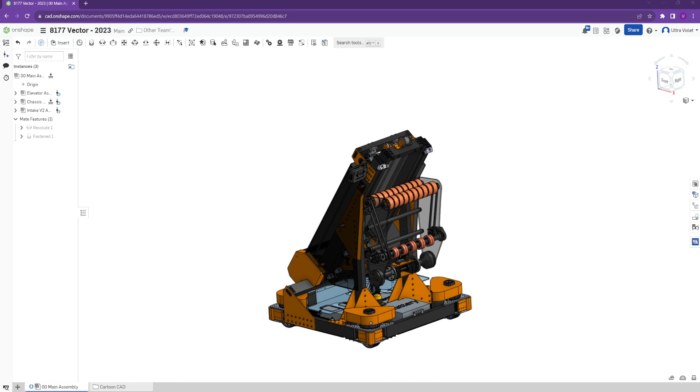Tonight we're going to be looking over one of our local teams that are pretty near us, Vector 8177. So they're an open alliance team, so they've been sharing their CAD and the progress of their season the entire time, and we've competed with them a couple times this season as well.

They had a robot that was pretty similar to X-Ray, but one of the reasons why I wanted to look at it was it's also different in a variety of ways. So seeing how another team built a similar robot to us and seeing some of the differences should be useful so we can see how we could have chosen to do things if we had decided to do something a different way.

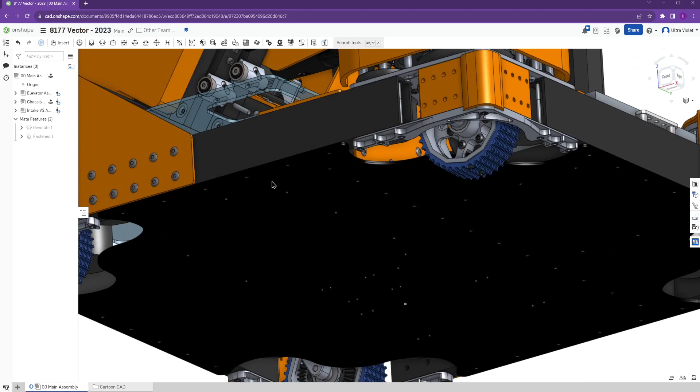So in terms of the mechanisms, they're pretty similar. They have a MK4I swerve drive base with a metal belly pan, same type of 2x1s connecting everything across. Versions of our Spectrum corners, I'm pretty sure this is actually modeled directly off of our 2022 ones. So a very similar drive base.

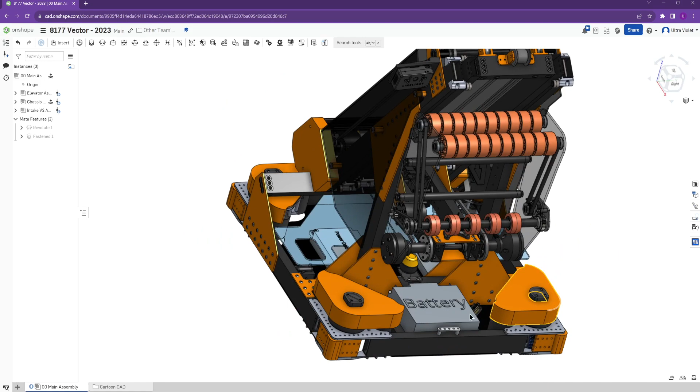But things start getting different when you start seeing just some of the dimensions and things on the robot. So if we look over, they're 26 by 26, so they're a square, where our robot was like 24 and a half by 27 and a half, something like that. So they're a little bit different, and they have a little bit more width to them, so about 2 inches wider and about an inch shorter in length.

So that does determine your wheelbase a little bit, so that means you're probably a little bit more stable from tipping over side to side, but slightly less stable tipping over forward backwards. There is some benefit to building even bigger, especially if you have a game where you have to reach up very high and where you might get pushed around at that same time.

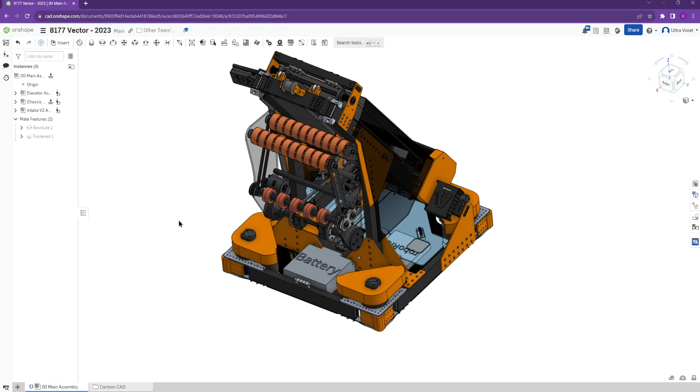So especially a game like 2019, where you have to reach up to the rocket and score on the high goals of the rocket, which was like 8 something feet in the air, and you had a defender that was possibly pushing into you. Having a much wider frame can be beneficial there, so you never get tipped over. Anything else you can do to keep weight down is always helpful, because that helps you not tip too.

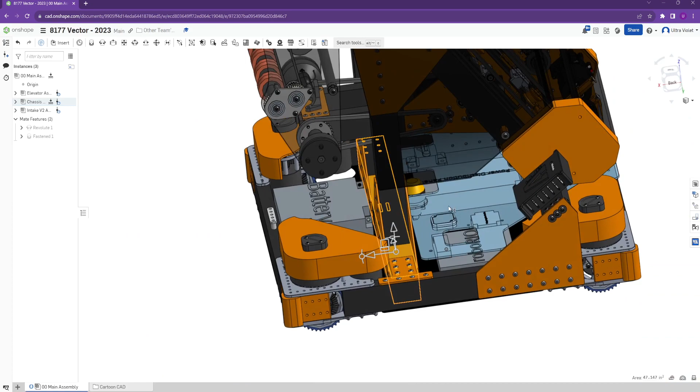The rest of their drive base is kind of built on what looks to be this main center pillar. So they're able to have this crossbar here that runs across their belly pan and separates where they have the battery. So they ended up putting the battery up front compared to ours, where we have the battery in the back. And then they have the rest of their electrical under what looks to be an electronics cover, and most of their main control system stuff, the RoboRIO, power distribution, all of that is on this side of that bar.

Looking at it, it doesn't seem like they have any wire pass-throughs up to here or anything, so they're just going to run everything over the center, so the battery cable probably just gets run over the center here. Likely with the lead sticking up, because otherwise they'd be hitting these posts here. In some way for a battery strap. I think this is a similar way that the Kitbot chassis does the battery strap right here.

That 26-inch width, one of the advantages of that is you can get the battery between two rails that run the whole length of your robot. This is basically the 2 inches that we remove from ours by having a 24-inch robot. And so the motors get a lot closer, and you can't really have these rails here if you do it to the width that we have been recently.

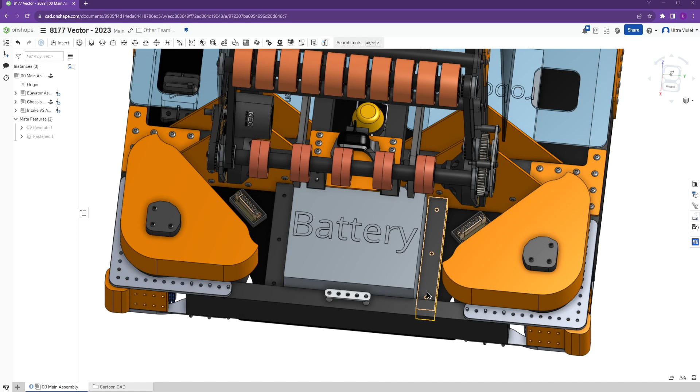So one of the thoughts is to go a little bit wider. It makes it harder for us since our laser cutter is the way it is. We can't laser cut our own belly pan if we do that, but we have sponsors who can laser cut belly pans, or we could route our belly pan if we needed to make it wider, or do the belly pan in 2 parts.

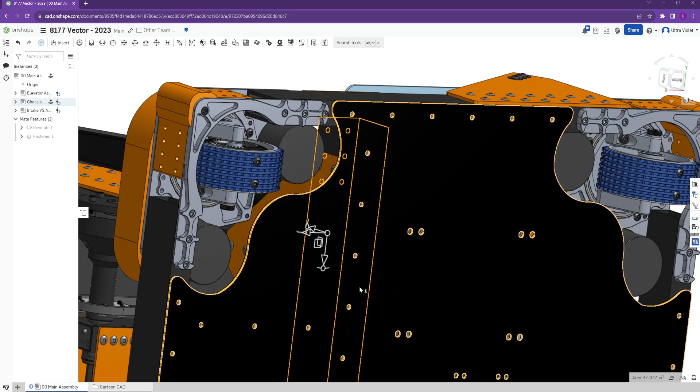So this gets fully gusseted. It doesn't look like it's mounted. Oh yeah, so it's mounted just on the center row right here to the belly pan, and then the gussets to the side rails, and then these big structural gussets up to the uprights that support the elevator.

And then the back end of their elevator is supported by a 2x1 cross beam, relatively similar to us, just going on top of their swerve modules. But they ended up doing it just by having the tube blocks here. So they have the bolts into

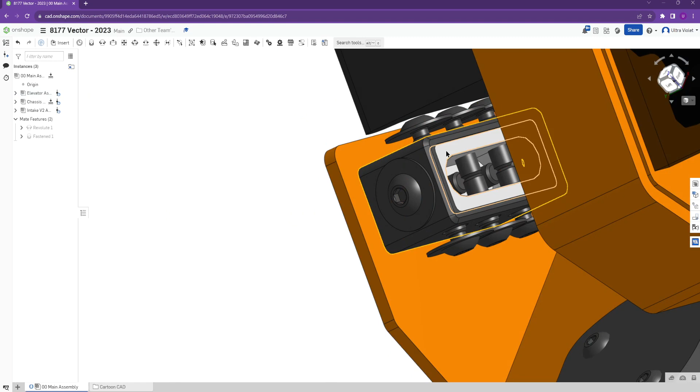the end cap or the tube end nut. If we hide that briefly, we can see the block inside of here. So these are the West Coast Products blocks. They fit inside with like a 3D printed exterior to fill the little gap, so you can use different size tubes. And then they just bolt everything into that. And so that's how they support their elevator across the back.

They have slightly different 3D printed covers than what we were running, where they just cover up the main motor gear set on the MK4i. But theirs seem to leave the belt exposed, so they can get in and probably do maintenance on it and things. And that still lets you grease the gears from underneath if you needed to, without having to take it off or anything like that.

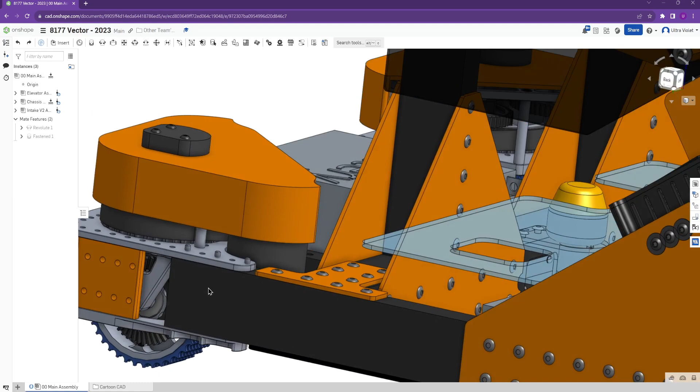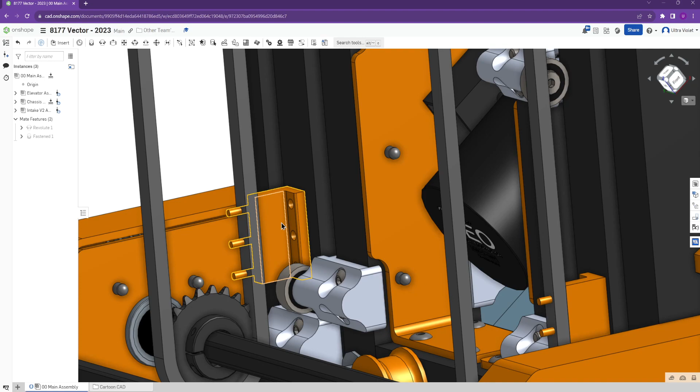All right, let's see. So going up, let me get rid of some of this covering to make it easier to see everything. We're just going to hide some Delrin panels. So the elevator looks pretty stock. They were actually using at least some parts from the Thrifty Bot elevator. There's different commercial off-the-shelf elevators you can buy from the different vendors. Like the Thrifty Bot has one, West Coast Products has one. AndyMark has some different parts of an elevator, so does Rev.

A lot of teams ended up kind of combining them to make the various elevator parts that they wanted. So they seem to be using the Thrifty Bot mounting bracket. These let you mount the elevator chain to your tube. These are nice big chunks of either aluminum or steel, I don't remember right now. But they're large and are spaced right for you to be able to put the pins through your number 25 chain and just bolt directly to it.

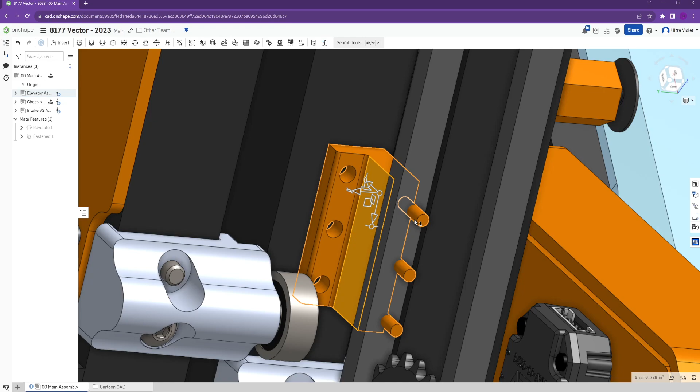So instead of us having that belt that goes through the whole elevator, they have these 2 loops of chain that power their first stage. So as they move this chain up, this stage of the elevator goes up and just gets powered directly by that.

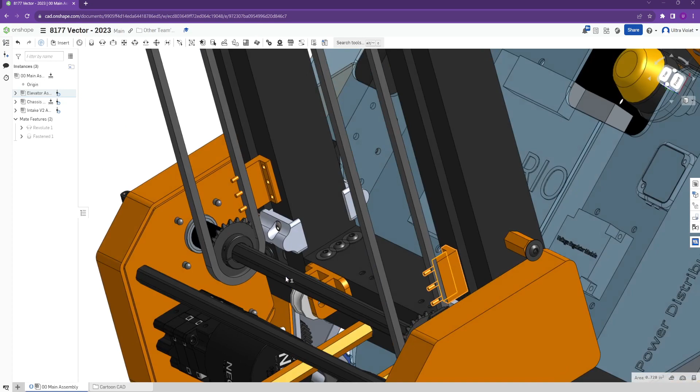They're also using West Coast Products bearing blocks. Oops, swerved around too much. Hold on. Okay. So these little bearing blocks here are the West Coast Products clamping blocks that go on the outside. And I believe these bolt all the way through. And then the inside bearing is on the block in here, like that. So you end up with a pretty small inside bearing, similar to what we had as well. I think they're like 1/2 inch diameter.

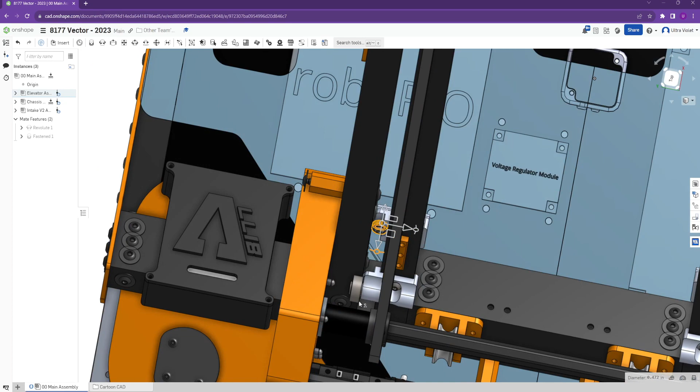I think they end up being half. It might even be a little smaller. But that's what the bearings ride on. This allows you to very easily use it with pretty much any tube. You can drill the holes yourself into tube, or you can use the Rev tube or any of the pre-drilled tube, and bolt all the way through onto the block. So instead of ours that bolted on the inside face, these clamp around the outside.

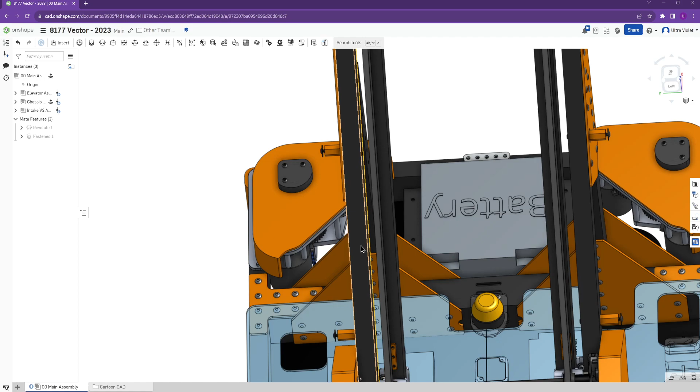And either of them still end up with a pretty large gap here between the tube rails, which sometimes can be a problem, but is also a lot of times fine. Most teams can get away with it without too much of an issue. Some teams use it for things depending on how they rig their elevator. Maybe easier to get string that runs inside the rails or belt or anything between it.

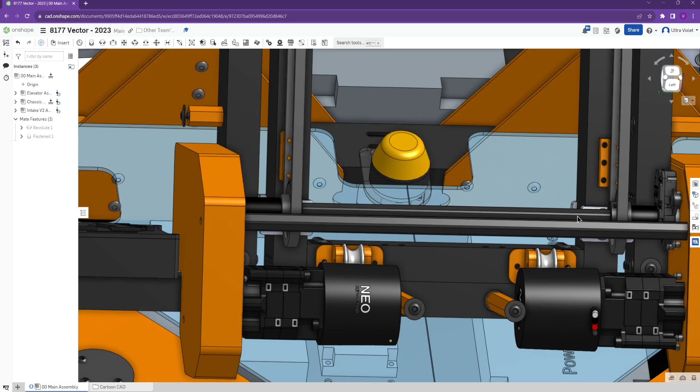The rest of their elevator, they use the tube plugs again, the same as where they mounted over here. There's tube plugs mounted everywhere inside these joints, so they don't have any external gussets. So there's not gussets running along these outsides anywhere. And if you had different bearing blocks, you might need them, but instead they're able to just bolt to the inside here.

So no gussets. It just kind of changes how you have to have your strength. All of it has to come from just these bolted connections. Most of the time that's fine. I imagine they didn't have these wide flange bolts everywhere, as they seem to intersect here. They probably just used regular bolts, at least on the middle one.

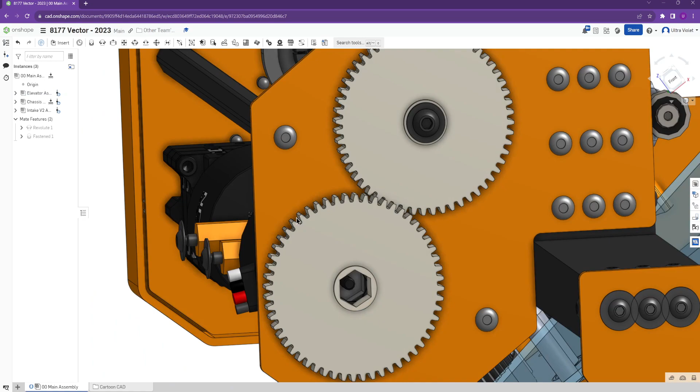To actually power the elevator, we have NEOs into MAXPlanetaries, into, let's see, if we remove this cover, what looks to be just a 1-to-1 gear reduction. So this was basically to be able to flip the motors around, not have them sticking out this side at all and overhanging. They just have, not even a gear reduction, just these two gears here to transfer the power here.

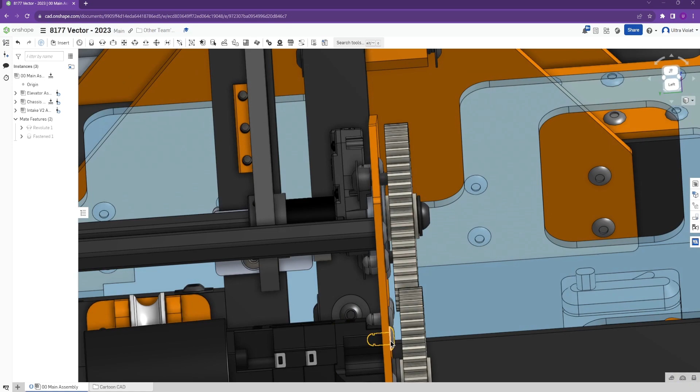Doing it with gears is fine. You could have also done the same thing with chain if you wanted to, possibly even belt if you had large enough pulleys. You could have done it with belt. It would have been a little bit thicker probably. It also means that if you have to change something up here, you don't have to take the motor off to do it. You're not direct driving the shaft. It gives you a bit more versatility.

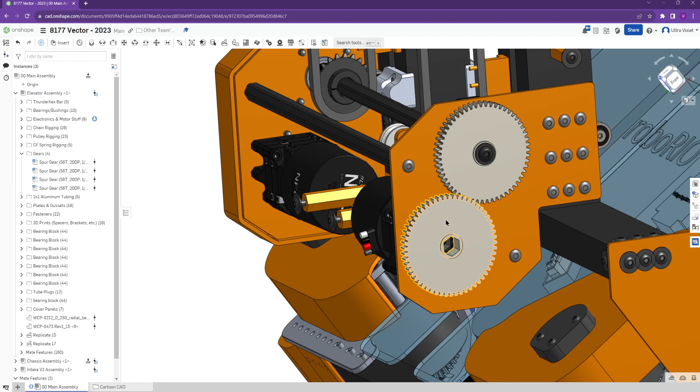If you needed to, you could possibly change this gear ratio. There's probably gears a little bit bigger than that. Let's see, that gear actually. Yeah, so it's only 56, so you could potentially make this gear bigger, make this gear a little smaller, and actually get a little bit of a bigger gear ratio, or go the other way if you wanted a little bit more speed. It might change how the covers and stuff work, but you could definitely do a little bit of configuring after the fact, after you build everything.

If you wanted to change your elevator speed a little bit, you could slow it down or speed it up by replacing these gears on both sides, in case you wanted to go a little bit more finer detail than you could get with just the MAXPlanetary here. Because the MAXPlanetary only has certain stages you can use, right? So if this is 2-stage, this is probably 3 and 3. For like 9-to-1, I don't know what it actually is, or if it's even configured to anything.

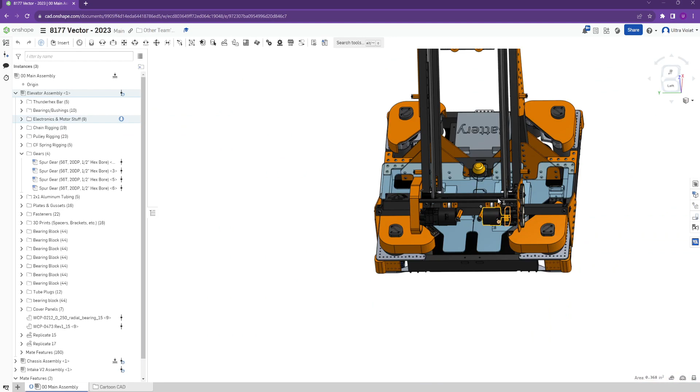Yeah, it's configured 9-to-1. So that's probably what they used in real life. Anything too much bigger than that gets you a pretty slow elevator. And then if you go down to 1 stage, you can only get to 5-to-1. So you have a pretty big gap in your reductions. We ran into the same thing. You're either at 9-to-1 or 5-to-1. So having this gear reduction out here does allow you to tune it a little bit more, which is nice.

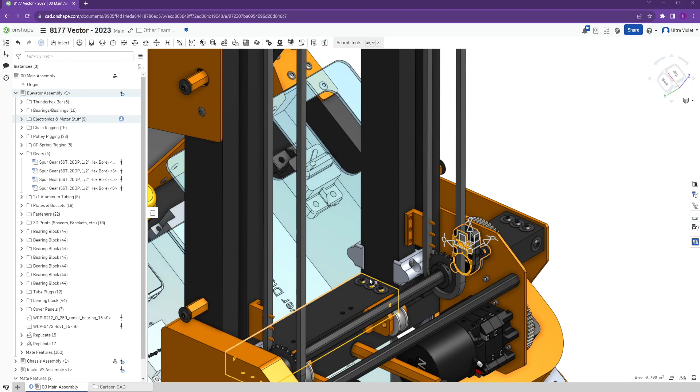Let's see. So they have the REV Through Bore Encoder. So this gives them an absolute encoder on this shaft, so they can use a little bit more precision in knowing where this shaft is when it's turning. Which is sometimes useful. You have to feed that back in either to the Spark Max or to the RIO directly. You also don't have any backlash from the gears or anything. So instead of sensing where the motor is, you're sensing directly where this shaft and sprocket are. So it probably gets you a little bit more precision on exactly which height your elevator's at.

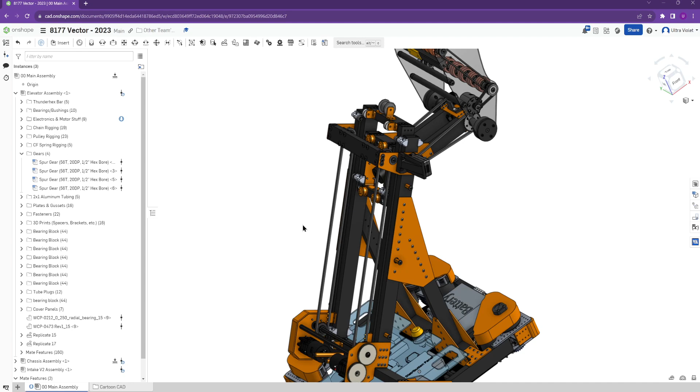What did we discuss? Okay, so we talked about the first stage of the elevator going up, powered by the chain. And so when you have this continuous loop of chain here on your first stage, this signals that you're going to be using the elevator rigging known as continuous. So on X-ray, when we looked at that, we had that one long snaking belt that went through all of the different stages and got attached to the carriage at the end. So that's continuous, because you have one motion thing, either chain or belt or string, going up all of your stages and ending at the carriage, and then getting pulled down back to your motor setup.

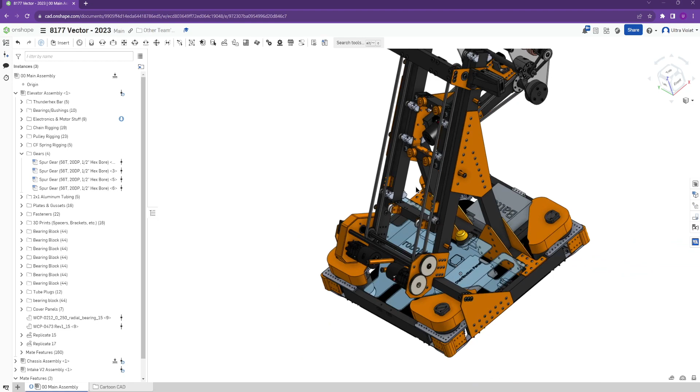In cascade, you basically move your first stage independently, and then you tie your next stage to the motion of that first stage. Let me separate these. Do something different. Hold on. There we go. Okay. So in CAD, it's a little weird sometimes. It doesn't always let you move it exactly how it moves in real life. But in real life, for every inch that this first stage goes up or down, this second stage will go up or down as well. So as this moves up 5 inches, this one moves up 5 inches from this stage. And so those are always connected together.

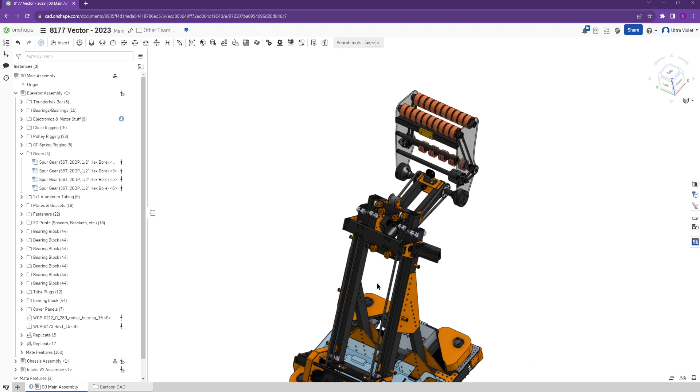Get that to where it's not hitting it. Okay. And so there's some positions that you can put into CAD that, when you're in a cascade rigged elevator, you can't actually do in real life. So let's see if I can get one. So with this first stage all the way down and the carriage stage all the way up, you can't actually do this on an actual cascade elevator because they're tied together. If this first stage is all the way down, the carriage is going to be all the way down too. And if they're both all the way up, they're both going to be all the way up together. And if one's in the middle, the other is going to be in the middle as well.

It's tricky to figure out. I think you have to bring that to middle and then this to middle. Yeah, something like that. So to get them both in the middle, it would end up about there is what it would look like when they're actually driving. And so the way they tie them together is with some string. So that's what these pulleys are for.

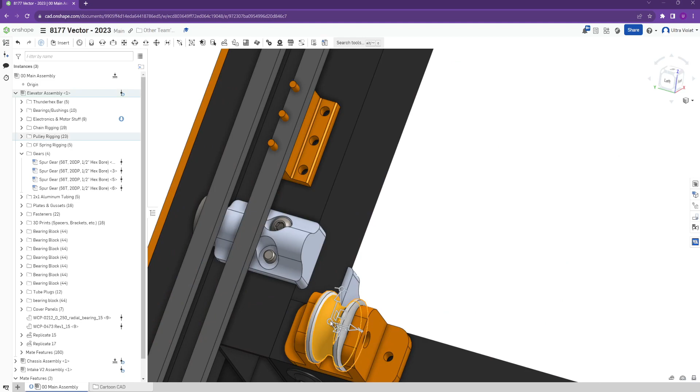They do them on each side to keep everything balanced, so you don't have any angling, so you don't have this side getting pulled up faster than the other side. That's why you have this chain on both sides too. It keeps everything kind of balanced and nice.

There's some redundancy if something were to happen to one of these chains or one of the strings. The elevator probably still works a little bit. It's not great, and you want to fix it after the match, but you can still move it up and down most of the time.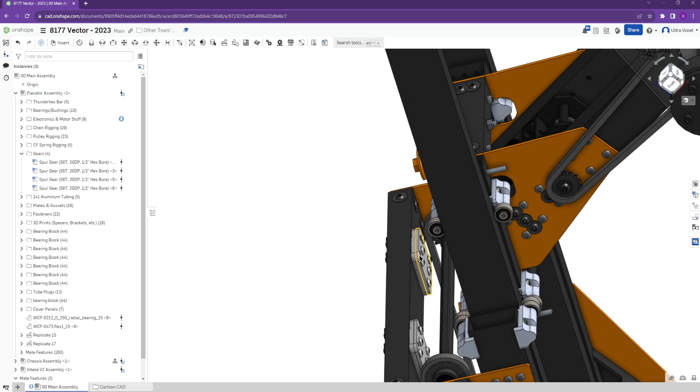So the string down here gets tied around and goes up to that pulley, and they're tied in different places. The string is mounted into these plates on this back bar, so this bit of string doesn't move. It's completely fixed and attached to this bar.

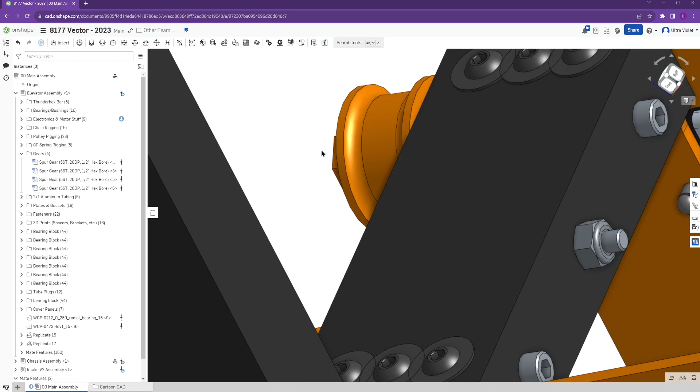And then the ends of the string are attached into these mounting points that are sort of cammed — or actually, I don't think they're cammed, I think they're just tight. They're able to pull these tight and tighten them up and wrap the string around it, which holds the ends of the string in place and allows you to tension them.

Since it's fixed at the ends and fixed here in the middle, it basically forces this to move up to the top when this part is moved towards the bottom. So it's the displacement between these two positions that's changing as it moves up and down.

This works with multiple stages. You could keep going — this has two moving stages, but you could have three or four, and you could build this same setup into all of them.

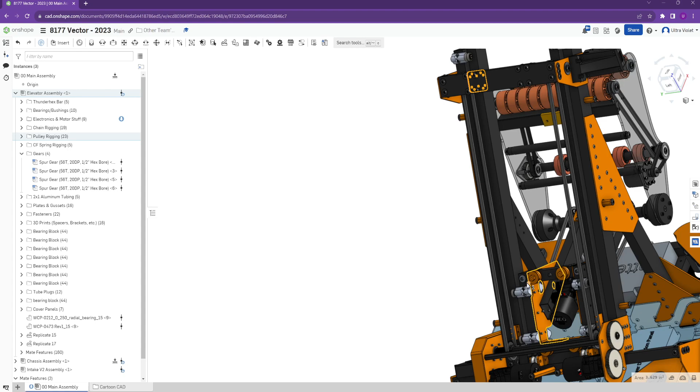Continuous and Cascade, most of the time, do similar things. But if for some reason you needed a setup where you could put the carriage at the top first, you can't do that with Cascade. If you really needed your robot to be in this position, with this all the way down and this all the way up, Cascade wouldn't work.

Some teams did that in 2018 when they wanted their intake to score over the top of their elevator. You couldn't do that with Cascade.

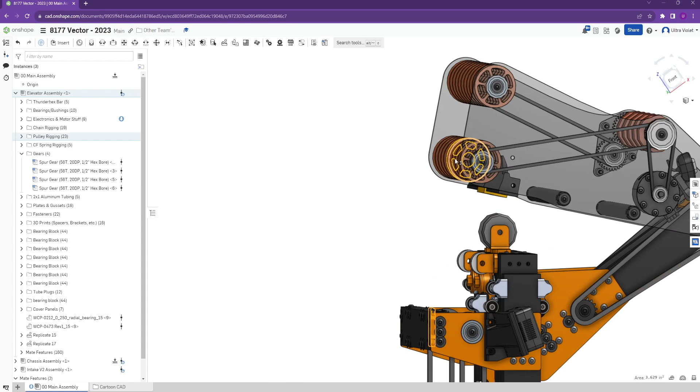Most of the time that's not a big deal. In games like this, you probably didn't need to flip your intake over the top of your elevator, so you weren't really worried about it. But in previous games, sometimes it mattered.

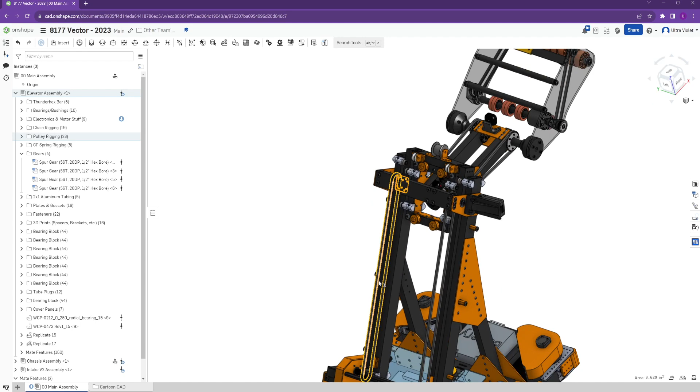The other thing Cascade actually helps with is you get a bit of a speed advantage, because whatever you're driving out here, whatever gear reduction is out here when you're spinning this up and down, you actually double that at your carriage. So you end up having to have a little more reduction on your motors, or a smaller pulley here, to move it up and down and still be controllable.

If this is moving at twice the speed of the outer section, since for every inch this moves, this also moves an inch, that ends up giving us two inches total when they combine.

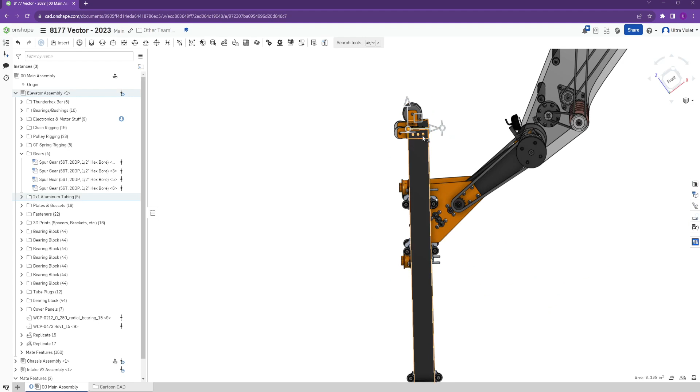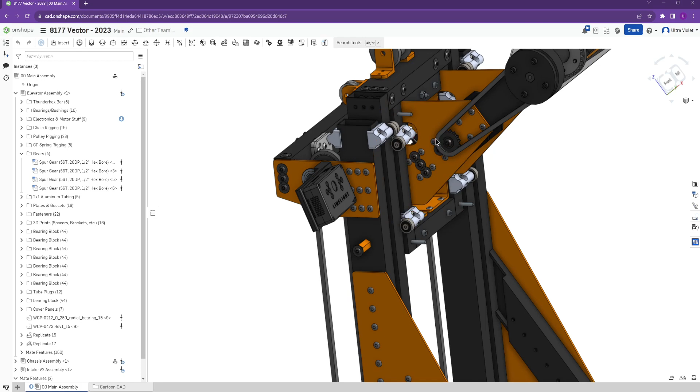A lot of teams used this in previous games to mount hooks up here for a climbing mechanism, so you can have more torque — you're able to lift more when this section pulls down than if you mounted your hooks on the carriage segment instead of the Cascade first stage. Because those two things move at different rates, you can use that to your advantage depending on the game and what you're trying to do.

In this game it didn't really matter either way. There were a lot of teams who had very good Cascade elevators, and a lot of teams who had very good continuous elevators. Some of it is just which way you feel comfortable building.

In the past, we had done mostly Cascade. We decided to do continuous this year, just because of how we wanted to package things. But we could have easily done something Cascade as well.

What did we not talk about? They have their gussets up here that mount their fixed back rail, which also has the bearings in place for the top of their sprockets. That setup's very clean and easy to potentially copy — if you had to build an elevator, this is a very nice, clean way to do it.

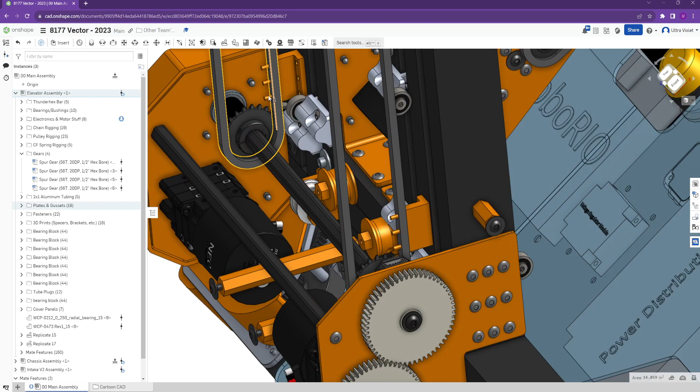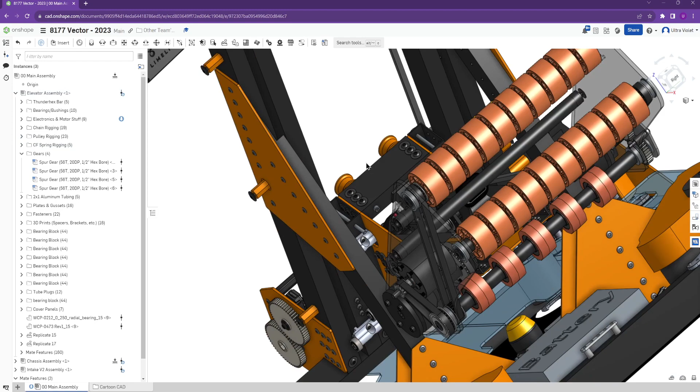It does look like this is the Thrifty Bot spool - I believe we actually own one of these. This is the holder for a constant force spring. A big constant force spring attaches to the carriage here and helps lift the whole assembly, taking some of the load off your motors so everything can move faster and easier. The motors aren't fighting gravity all the time, they're just fighting to move the system, since the spring is doing a lot of that work and moving less weight. Okay, I think that's most of the elevator.

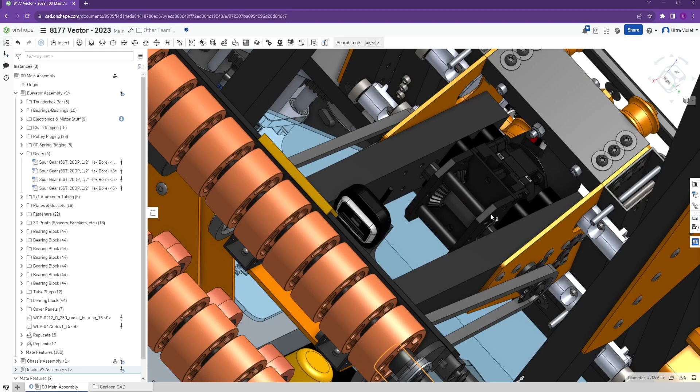Similar to X-Ray, they had a wrist, but instead of a 4-bar, they just had a normal pivoting shaft. So their wrist was this mechanism out here. They have a Neo with a Max Planetary and a Max Planetary 90 that they use to get sprockets on both sides.

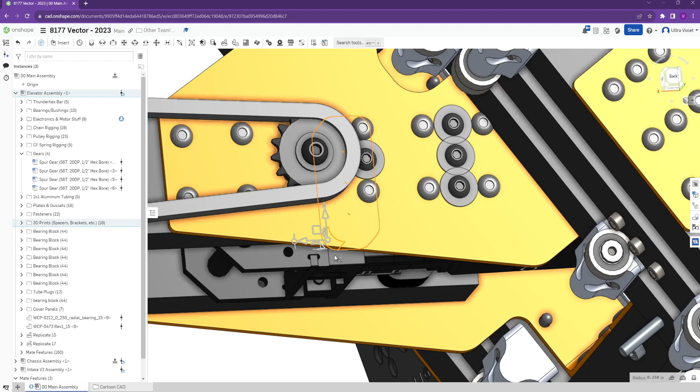Okay, so let's see how they mounted some things into this. They ended up having what looked to be probably 3D printed spacers here, and then likely - I'm not really sure how they mounted that - somehow they mounted into that plate. It looks like they're CADed as just rivets.

Let's see if I hide this. Yeah, it doesn't show anything going into here, but my guess is these bolts are actually just bolts long enough to bolt through and into the Max Planetary mounting in here. That would be my guess.

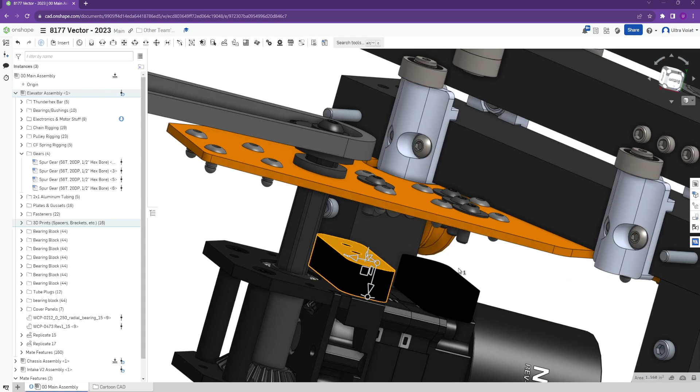Let's see, to do it on the other side? No, okay. So otherwise you have to have some way to mount it, and there's no easy way to mount from the inside out anywhere. So it's probably bolts going in through the spacer and just locking everything in place there. That's mostly just holding the motor and stopping it from rotating while it's trying to spin the actual arm, not really doing too much structural work.

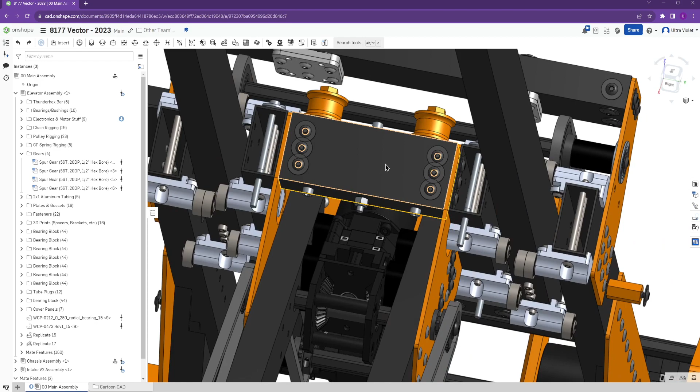Because you do have the crossbar of the actual carriage kind of holding everything apart. Oh, even more so, these plates - that's interesting. These plates were actually designed with a bend in them, at least what it looks like. Yeah, so you get a lot of strength there when you have this full aluminum gusset that's even bent down and attaching to this lower rail. It would be very hard for this to deform too much.

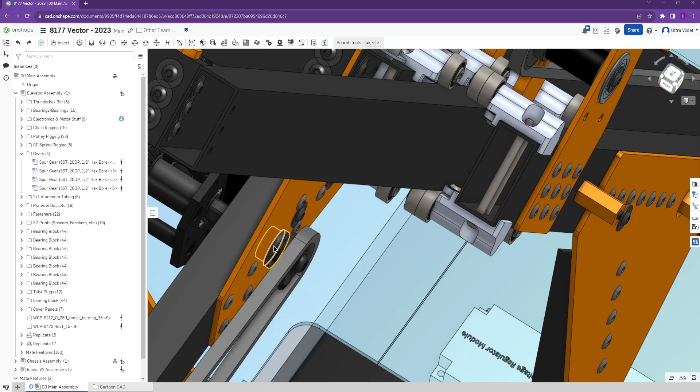Let's see - yeah, so it's just an 1/8 inch aluminum plate that attaches everywhere, supports the bearing, or supports the shaft at least, with a bushing. So they ran with likely Thrifty Bot, possibly West Coast - probably it'll tell us. Yeah, Thrifty Bot bushing. So instead of a bearing where you have rollers that actually spin, these just spin in the bushing and kind of rub against it. They're made of Delrin, so they're smooth, slick plastic that reduces friction, so anything that's not going to be spinning very fast, this totally works for.

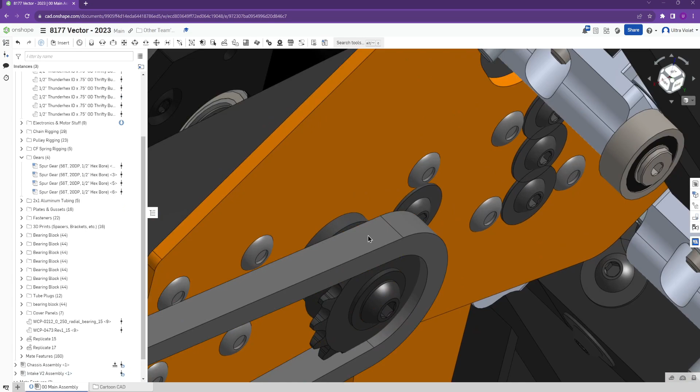And the wrist is not going to be continuously rotating, so it's never going to be spinning all that quickly - you're only going to do that kind of pretty short motion in and out with it. So that should work just fine to have a bushing there and not a bearing. Again, it looks like they just have them on these outside plates, which is fine - you don't really need them on the inside. You already have the bearings in the actual Max 90 supporting the shaft, which should be plenty.

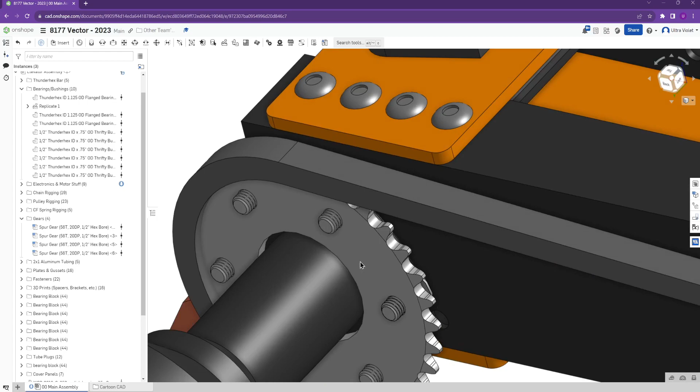Up here, we see how they actually mounted their arm itself. So looking at this, what do we see? We have the two sprockets that are driven by the smaller sprockets in the back, and it looks like they're mounted to hex hubs here. So these are Vex Pro hex hubs.

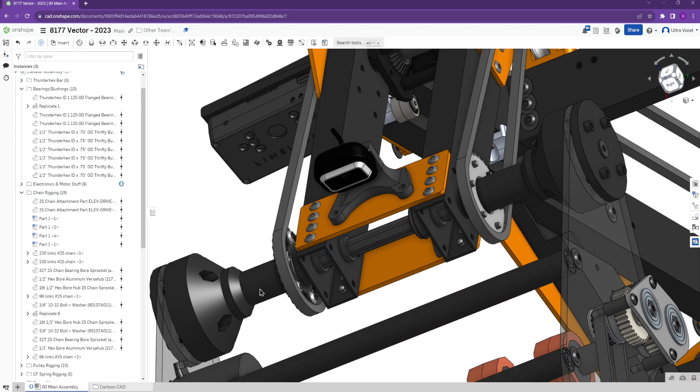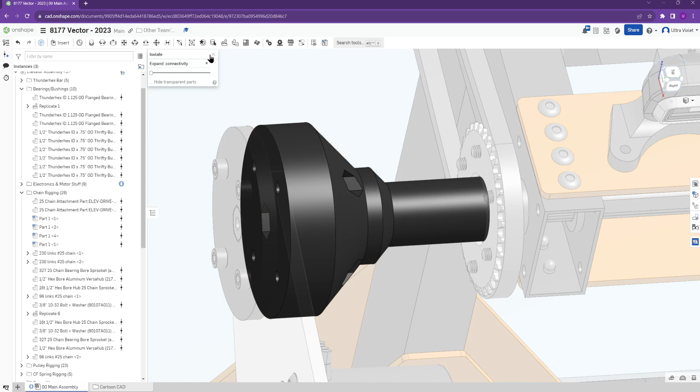Then they have these 3D printed parts here that are acting as their hex hubs for the intake arms. So you have these large 3D printed parts in addition to - oh yeah, so the polycarb part doesn't even have a hex in it at all, it's just round.

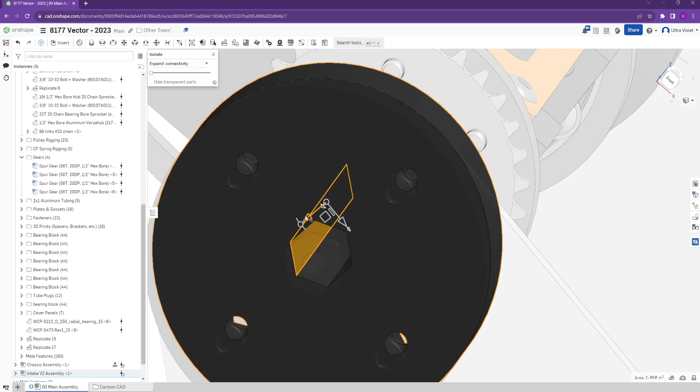You're just transferring all that torque through these printed parts. They have nice big 3D printed parts, so they're not going to break easily. They did embedded nuts, pushing them inside so they can bolt into it. There's a very long part of the hex in here, so it's really hard to round that out. You have to push through a lot of filament to round this out completely. Not impossible, but pretty difficult.

And since there's not a ton of load on it, just the wrist, and you have it on both sides, it's probably fine to do it that way.

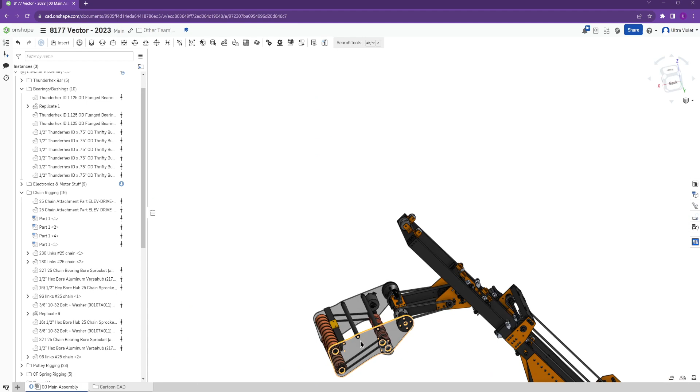Again, they have the bushings up here to support the rotation of the shaft, and they also embedded one of the REV through-bore encoders so they can know the exact position of their wrist without having to do the zeroing from the motor encoder. They have the sensor here to tell them exactly where this is tuned to. Even if they start it in a different position than normal, it should know its angle directly and be able to tell you where it's moved to.

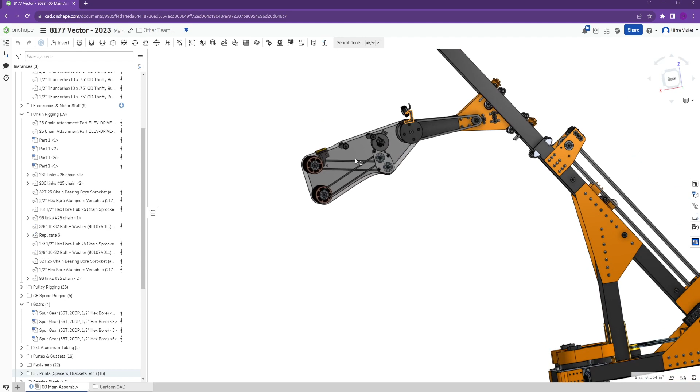All right, so what's the last thing? So they do have a little camera mount for their driver camera. This lets them see the intake at all times, so if they're going up and getting from the feeder station or anything, they can see if they're ground intaking or scoring. They have that camera view for their drivers.

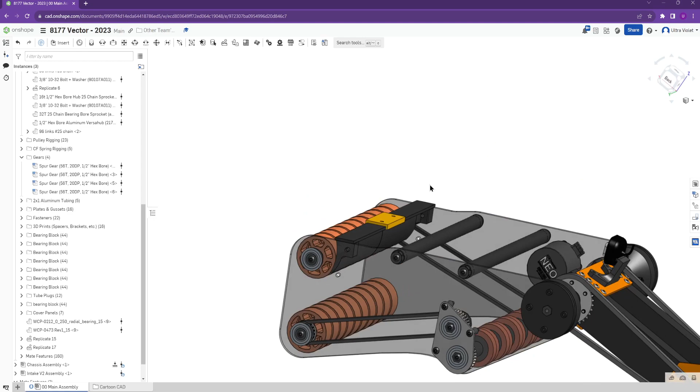And then the last part of this robot is the intake, which is 6mm, quarter inch polycarb, 0.22, that kind of standard-ish polycarb size. Gap is—didn't get gap, got surface area. Gap is 13.5 inches, so plenty of room for the cube. And then the cone comes in through these rollers here.

Let's see how they did power transfer. So they did power through the outside — the Neo mounted directly to the plate, and they go belt to the hex shaft, that then goes through the inside roller, their back roller. It's powered all the way through.

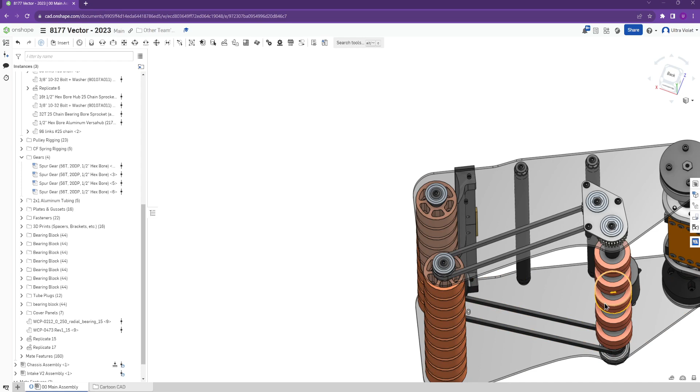And then these two front rollers have to be spinning in different directions. Actually this bottom specific one has to be spinning opposite of these other two because they want to be able to suck the cone in between these two and the cube in between these two. So it's okay if these are spinning in the same direction, but you need this one to be spinning opposite.

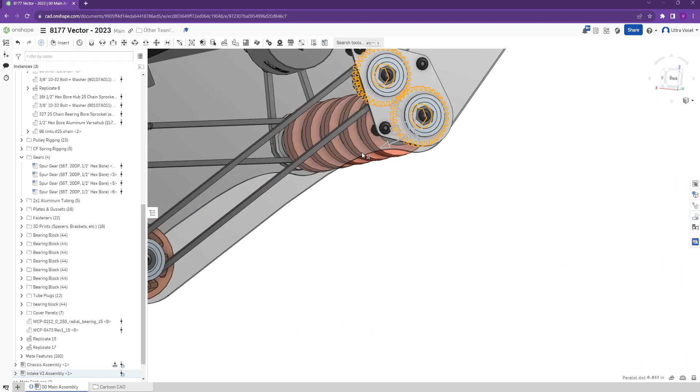So they do that by having the belt here connecting these together — these are spinning the same direction because belts don't flip direction when you power transfer. Then on the opposite side, they have a gear setup that gets them the ability to flip the direction because the gears do flip direction. And then they have another belt that comes up and powers this front roller so they can have the counter-rotating rollers that they need to suck in the cone or the cube.

What else do they do? So they have these additional little bearing plates out here so that they have this intermediate shaft right here for this gear and pulley, being able to be supported by two different bearings — one in this exterior plate and then one on the interior plate.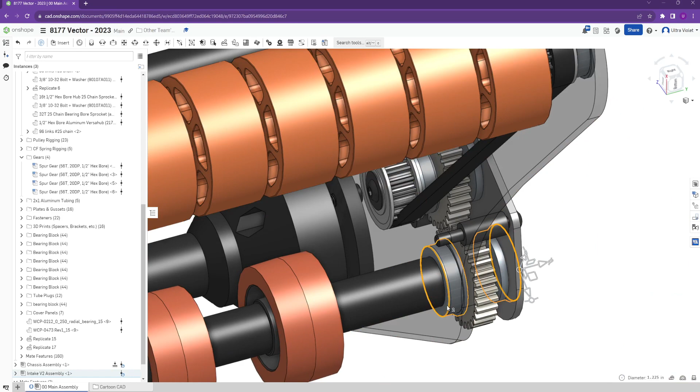In CAD, they ended up having this shaft has a lot of bearings on it. It doesn't necessarily need to — I guess it only has 3, so it's probably fine. With the distance that it is here, there's no issue in supporting it with 2 bearings here. If you didn't, you could possibly see some deflection between the gears. You probably would get away with just having the shaft end right at the end of this bearing, at the end of this gear, if you wanted to. But having the extra bearing doesn't really hurt you in any way.

In most things, especially when it's just mounted into the plastic with bolts, it's going to kind of self-align. It's not going to cause any binding or anything like that — unlikely.

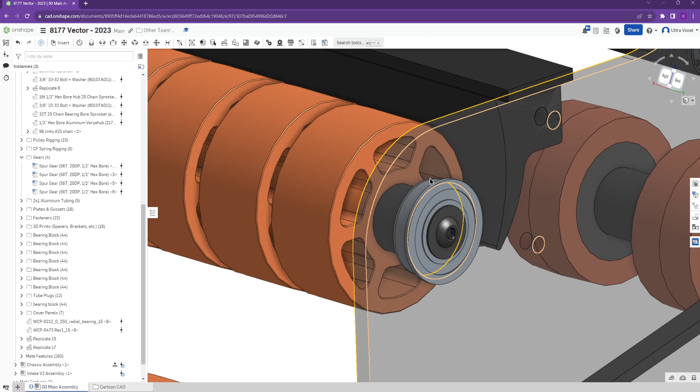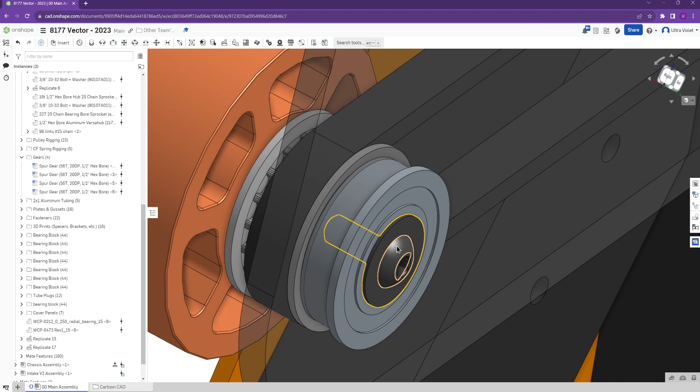Let's see. Yeah, all of their shafts are just powered hex shafts in rounded hex bearings, most likely, and then they just have the tapped ends with bolts, which we're probably going to use a bit more next year. It's super fast — we can just cut the shaft, tap it to 10-32, put these bolts that already have the large washers on them to secure it so you can't pull it through the bearing. So it's nice and easy to make roller shafts quickly. It does mean that taking them off can be a little annoying sometimes, depending on how you get them through the plate.

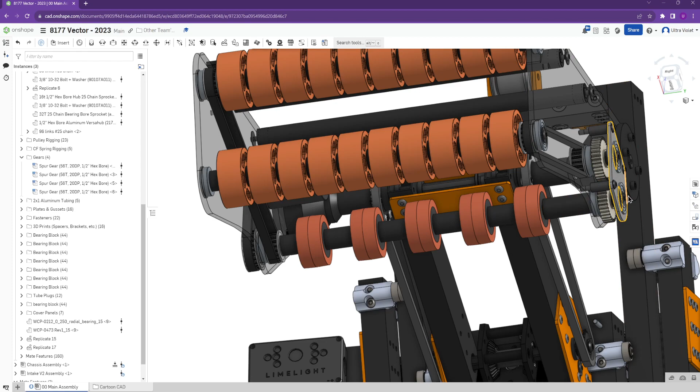So this back shaft, if you had to change it, is a little complicated because you have to take out the bolt from this end and push the shaft all the way through the other end. So if you needed to replace one of these interior wheels, it does take a bit. You have to drop everything out, slide the new wheel on, then push everything back on, get it all aligned and set up. You can't just pull the roller and replace it. So there's some things you can do to improve that.

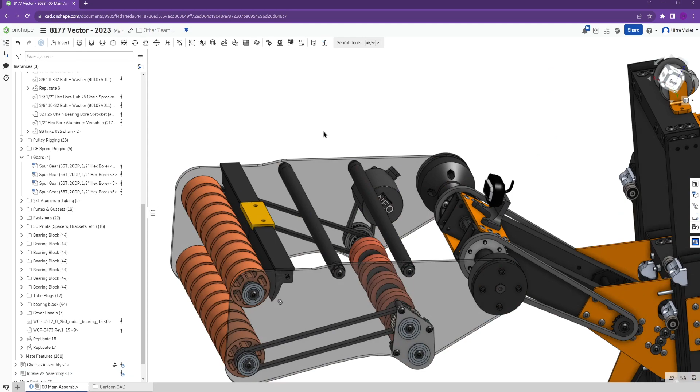Yeah, they do have the standoffs back here to stop the cube from going back out of the intake. I don't actually know what they're doing here. This looks like a 3D printed part that is either stopping the cone from going in at a weird angle or stopping the cube from touching this roller, probably. Because you wouldn't want the cube trying to force its way out of this small gap as this is intaking in. If this is spinning this way, that means this is spinning the opposite way, so the cube could try to force its way out. So it's likely that these parts are there to stop the cube from trying to do that. That would be my guess, at least.

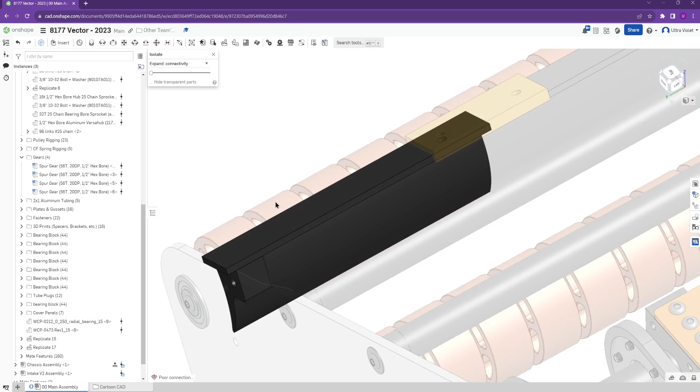That's a pretty good use of a 3D printed part. You can get that nice, weird, sloped concave angle there that would be really hard to make any other way. Very easy just to bolt that into the plate. You can add a little bit to stop it from rotating up at the top of the plate. So it's a very easy use of 3D printing. And they just have a little connector piece here so that they can make these into 2 separate segments, to make it even easier to print. You don't have to have a super long or super large printer to print this all as one piece. Just do it as 2 and then bolt it together here in the middle.

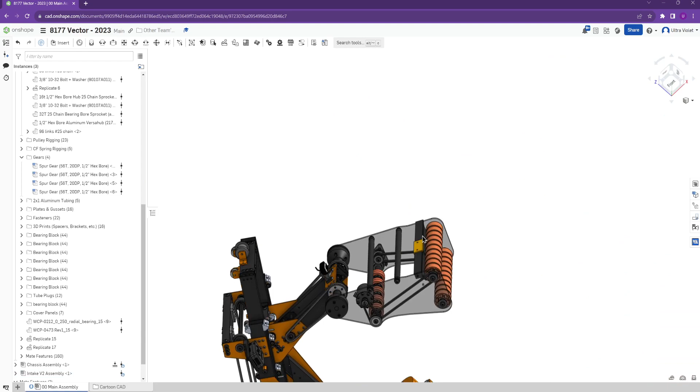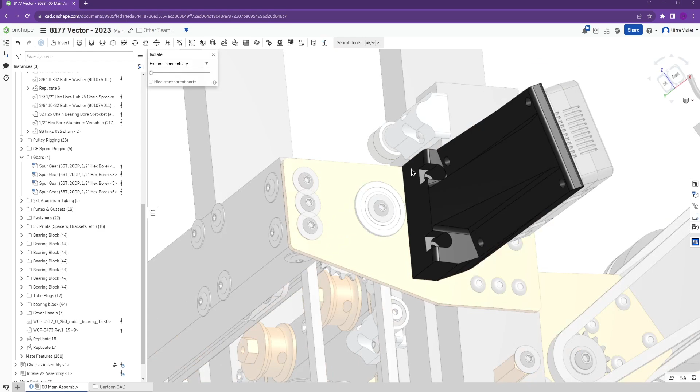Let's see what else. Oh, we have another 3D printed part here. So they have a limelight mount they made. That's another just printed part. Lets them print it nice and easily at the angle they need, and then just bolt it to a piece that's already flat. So this would be a pretty easy thing to print. Shouldn't need support or anything. It's just going to print with this on the bottom and go straight up. And you get the angle very cleanly. You get nice places for bolts, and then bolts and zip ties for your limelight.

Very easy construction there to be able to set an angle exactly like you need, to find that all in space for your vision processing or anything else you need.

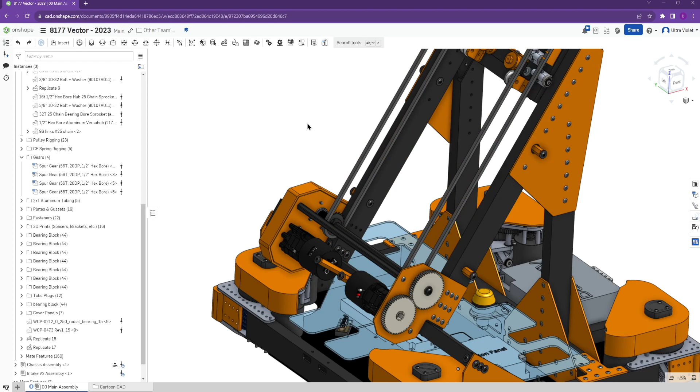I think that's most everything on this robot. The other really nice thing - we already talked about their polycarb covers, but we didn't talk about the other covers on this robot. If I can get back to, let's go back to the beginning, let's use the Onshape version, I can just go back to start. So we can see their covers. They do have a lot of bent polycarbonate things to stop anything from falling into the robot. It also just makes their robot look really slick and clean. They keep all the edges lined up with their gearbox covers here that are printed.

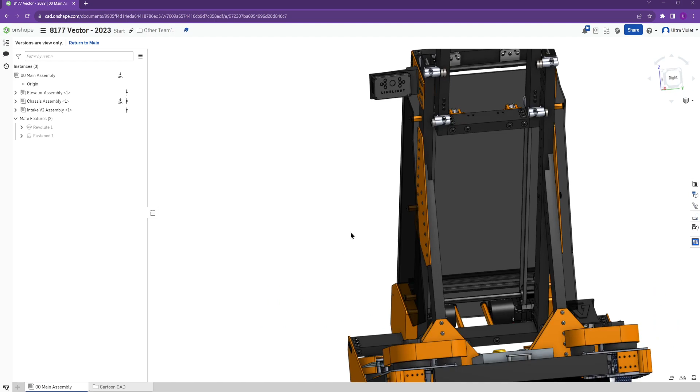And so they just do all that with standoffs coming off their rails. So they have a few hex standoffs here, there's ones coming off the tube in here. That's not too bad, and it was pretty easy to do. I think it's all just eighth inch polycarb that they bend up and around. They can put all their sponsor stickers and labeling and team labeling on it, and it makes for a very clean external package. It makes it very hard to get any game pieces stuck in their robot, and relatively easy just to pull a few bolts to take it off to do maintenance or work on it. Nothing too complicated there.

Yeah, overall, it's very nice, well-designed systems in place. The intake was able to go down and get floor cones and cubes. Somehow in there, once you have the bumpers and everything and the cutouts, you can actually get the intake to move correctly, which Onshape doesn't want to do right now. But they were able to iterate throughout the season and make a lot of different things work and have a pretty successful year.

All right, I think that's the end.